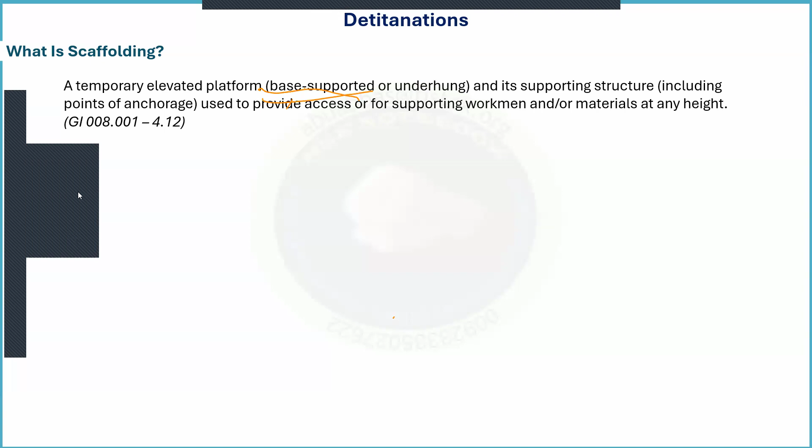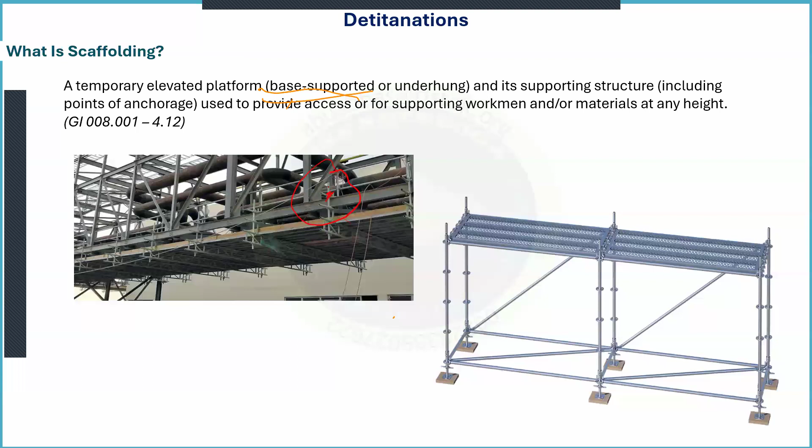Moving further, we have formwork. Formwork is another definition. We use this term according to GI, we will look at that. Formwork refers to a structure, a system, a pipe tube assembly that is used to support fresh poured concrete.

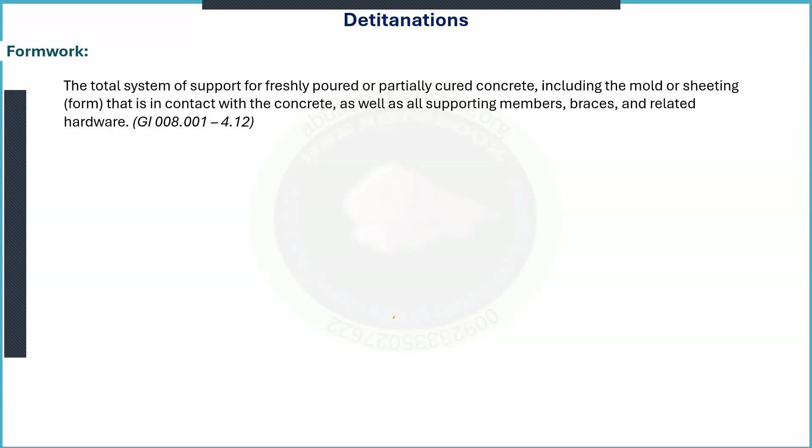For concrete pouring work, the installation we are going to install will be referred to as formwork. You can see here in the picture, there will be concrete expected, or maybe it's already poured in this picture. So that is what we refer to as formwork. Here you can see this picture as well, these supports for the work being carried out for the concrete.

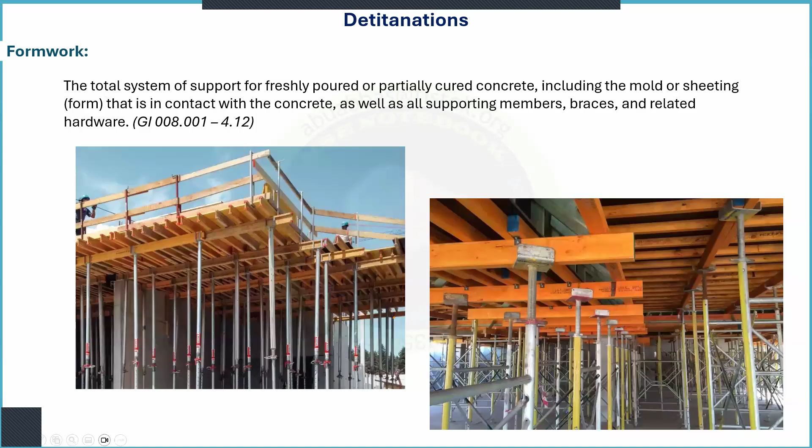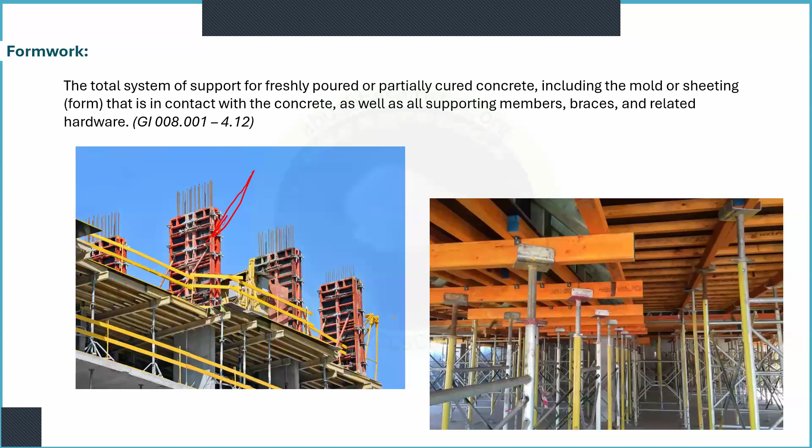Another minor thing I would like to add, in this picture you can see the vertical members. When the vertical things are used, like this one, we normally refer to them as shuttering work. For the concrete, when we use these vertical ones, these are referred to as concrete work. The other things, the horizontal on the plan and supportive structure, we refer to as formwork. Then we have another definition: falsework shoring.

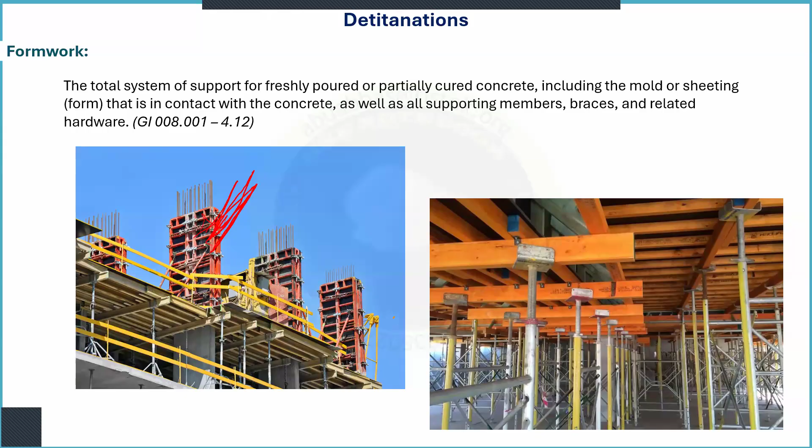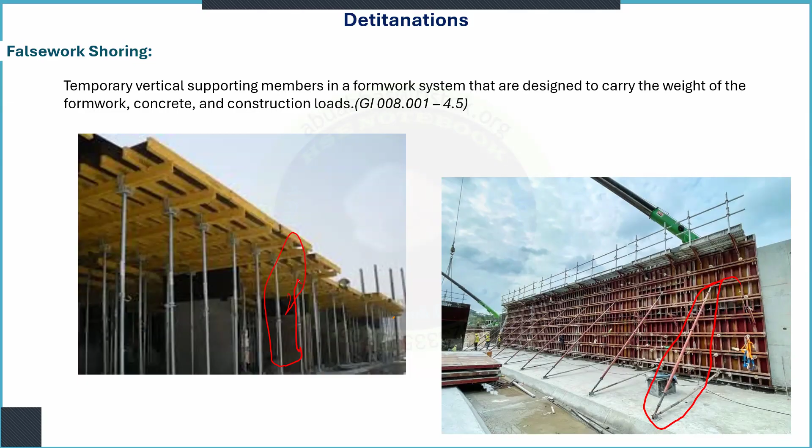Falsework is also used to support any structure temporarily. For example, we are going to erect the second structure and roof, and we are giving support to the first one, that will again be a falsework. We have a temporary construction load, brick storage, or something else, and we want to give support to that roof over which we are putting this material. We refer to it as falsework also.

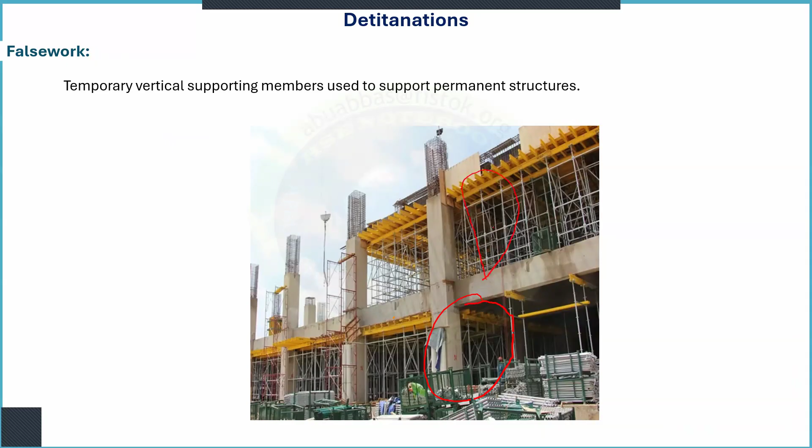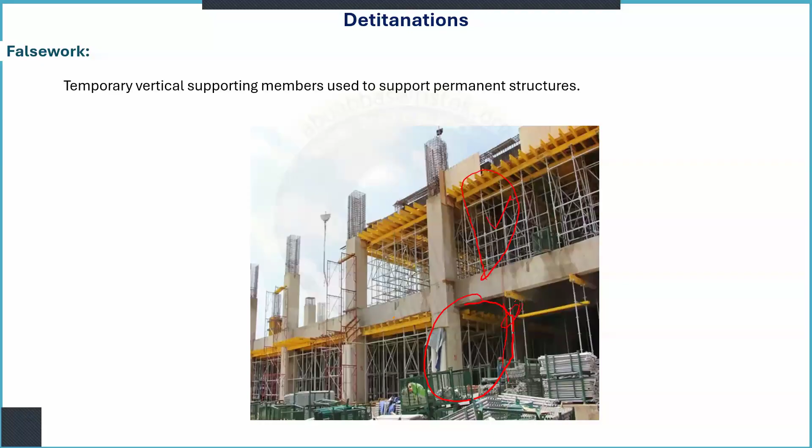Again, a temporary vertical supported member, like here one already seems finished in the base section, we can say it's completed, and then we are going for another one, and we have a support. So this is fresh work, and this already cured or maybe during cure. Additional support to anything we refer to as giving temporary enhancement or support, this is what we also call falsework. Aramco GI's definition uses the term falsework shoring.

Scaffold craftsman: we define a person as a scaffold erector. That erector has to work under direct supervision of a scaffold supervisor for any type of erection, alteration, or dismantling. There are three definitions here: erection, alteration, and dismantling. Erection of scaffold means making the scaffold, building the scaffold. This is what we refer to as erection.

Dismantling is when we are bringing the scaffold down, when we are removing it. Altering or modification is when we do any type of change, for example shifting the guardrail up or down, or giving access, a pathway in the platform. Structurally, we normally do not prefer it, but it can be done if not made for the exact work. Anyhow, when in an already made scaffold we do any type of change, that change we refer to as alteration.

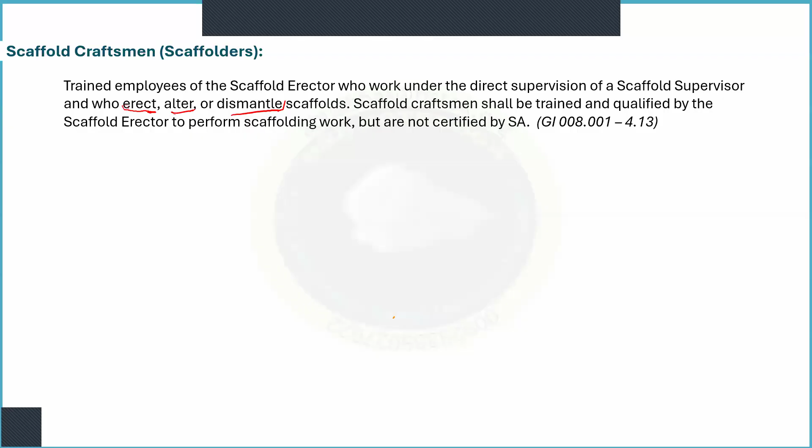Scaffold erectors, as mentioned in the GI at 4.13 section, are to be trained and qualified by the company they own, or the scaffold erector organization they work for. They are not mandatory to be third party. If an organization has approved in-house training, they can provide it, or third party can provide it. These are the two options, and they are not required to be Aramco certified.

Scaffold erector: the organization or company responsible for proper designing, erecting, alteration, dismantling, and modification of scaffold work. That company will be called a scaffold erector.

There is another terminology: special scaffold erector, if I'm not mistaken. They are specific approved companies from Aramco. When the name comes up in a further slide we will discuss it again, like R.B. Hilton, Al-Suwaidi, Al-Imran, SGB, and a few other contractors. They are special contractors for special scaffolds, and we will talk about them again when the discussion comes up in the slide, inshallah.

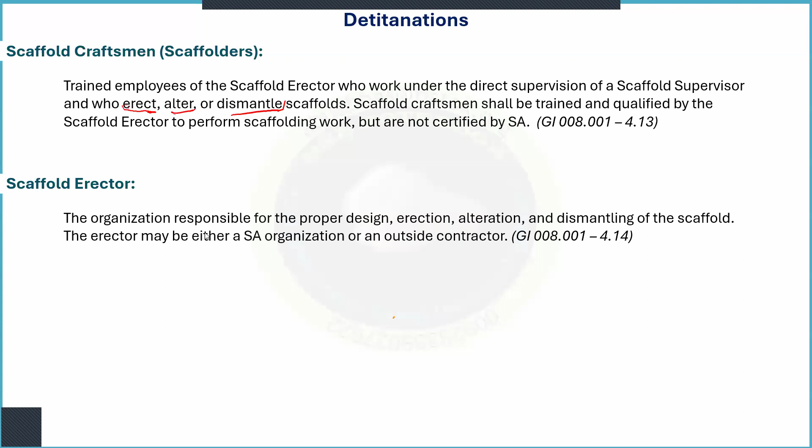After that we have the scaffold inspector: a contractor or Saudi Aramco employee, trained and experienced, capable of performing a scaffold inspection. You have to identify hazards and weaknesses, or give assurance through inspection of a scaffold. This shall be certified.

The word 'shall', wherever it comes, means a mandatory requirement, 100% compliance in procedure language. 'Should' cannot be considered equal. So Aramco certified people are required.

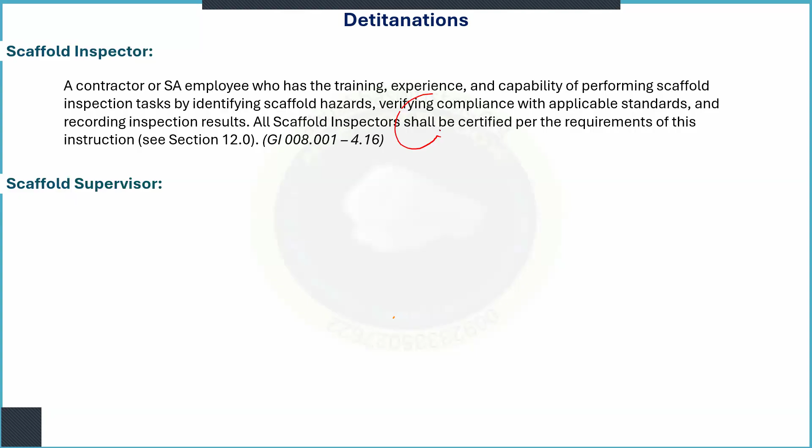Then we have supervisors: full-time employees of the scaffold erector, who are the immediate supervisor of craftsmen erecting, dismantling, altering, or modifying scaffold. He will be the direct boss of those people and will supervise those scaffold erectors. He has to be trained, qualified, and certified personnel. After supervising the work, one of his jobs is to inspect the scaffold as well.

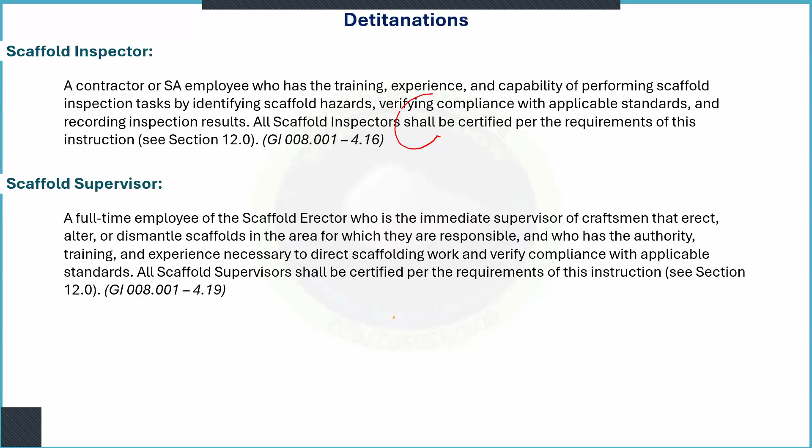Scope of supervisors: we have three types of supervisors in the Saudi Aramco pattern. We have scaffold supervisor 1, or S1. He can supervise scaffold erection, and in addition, inspect and sign tags for all types of scaffolds, including special scaffolds. He requires at least 5 years of experience as craftsman with scaffold erection experience before he can get the Saudi Aramco scaffold supervisor S1 certification.

His limitation for card signature is that he can sign the card for any type of scaffolding, including special scaffold. But once it's special, the inspector has to countersign the card, and in addition, whenever the scaffold is above 6 meters, the inspector has to sign along with the scaffold supervisor 1. Commonly we have these scaffolders, but special contractors, according to their material use, have others as well.

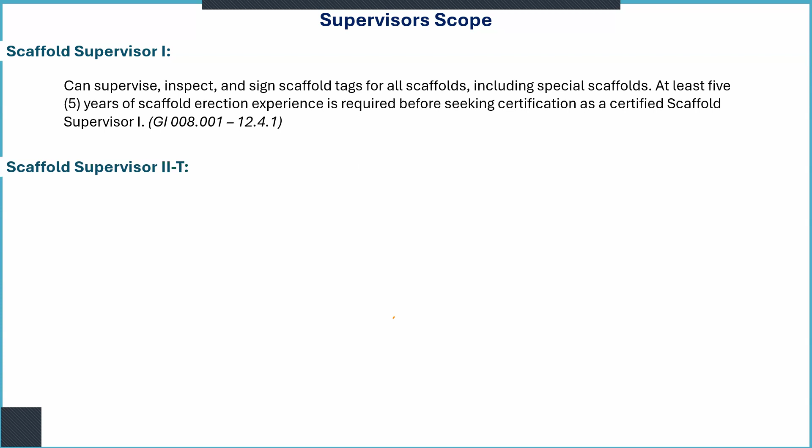Scaffold supervisor 2T can supervise and inspect scaffolds of tube and coupler only, maximum up to 12.2 meters, alone. Only tube and coupler scaffold less than 12.2 meters tall, excluding special scaffold. They cannot sign for special scaffolds. Up to 12.2 meters they can sign alone, no need for signature and inspection by an inspector.

Similarly, we have scaffold supervisor 2S, S for system scaffold. They can supervise erection, dismantling, modification, and then inspect and sign the tag for a system scaffold or fabricated tubular frame scaffold, again less than 12.2 meters of height, excluding special scaffold.

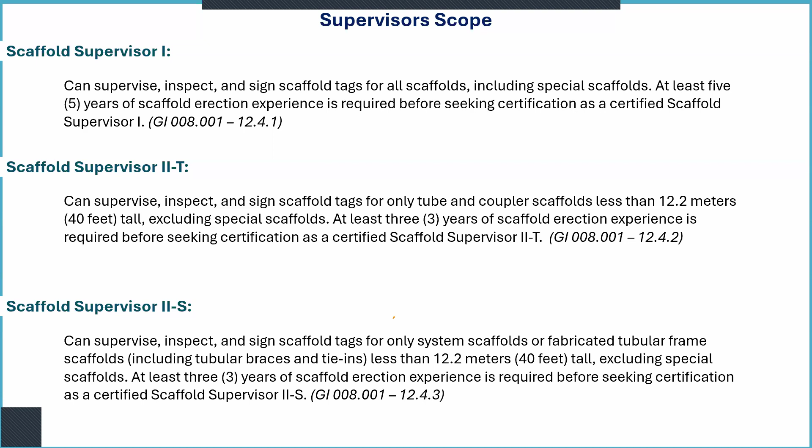Yes, gentlemen, can you hear me still? Yes, sir, we are hearing you. Your interference, a little bit of interference, will be appreciated. So I know that someone is still with me. Yes, sir, thank you.

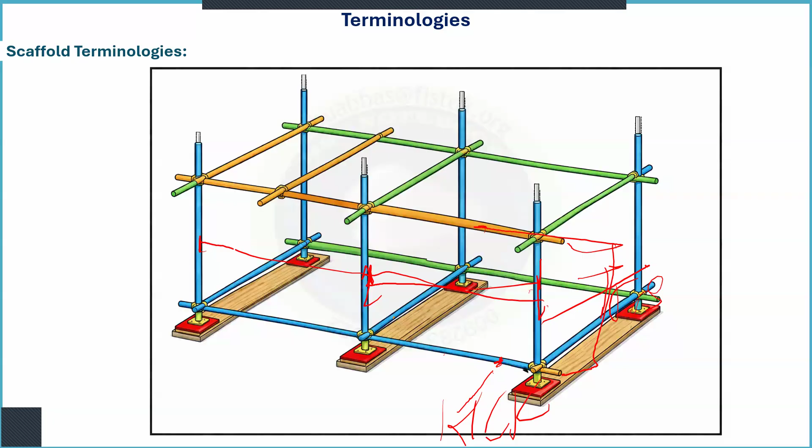Okay, purpose of 2.1, it means that wherever we mention, like GI was mentioned, it means... gentlemen, I'm having a response, the voice is coming. So you can check your mic or so on. Or if someone else is having trouble, let me know.

So where we are not using a reference, it means we are giving the reference number of CSM, Construction Safety Manual, Volume 2, Part 2, Chapter 2, Scaffolding. The scaffold CSM says this chapter describes minimum safety related technical requirements for personnel access scaffolds with fixed platform heights. So it's telling us that the platform height will be fixed.

Meaning we are not talking about ones we can lower with a chain or rope, either ground supported, underhung, or above any structure, but non-extendable, non-retractable, with solid measurements, with solid members - this is what this scaffold will be.

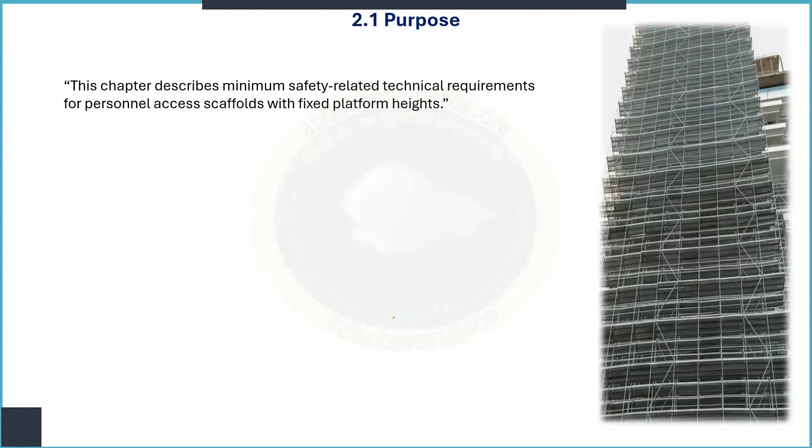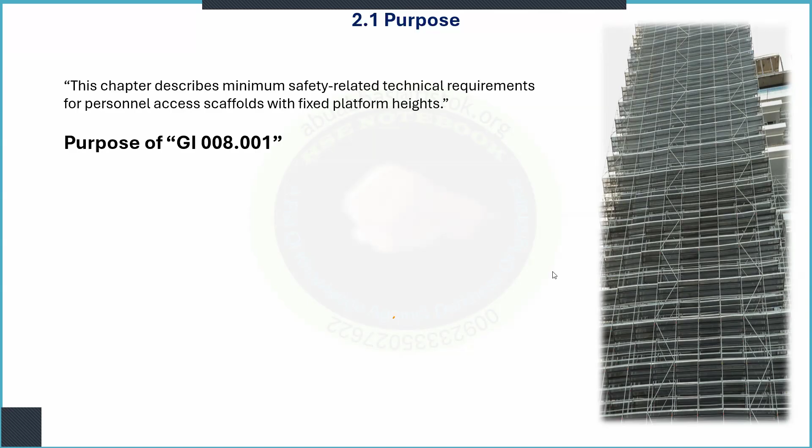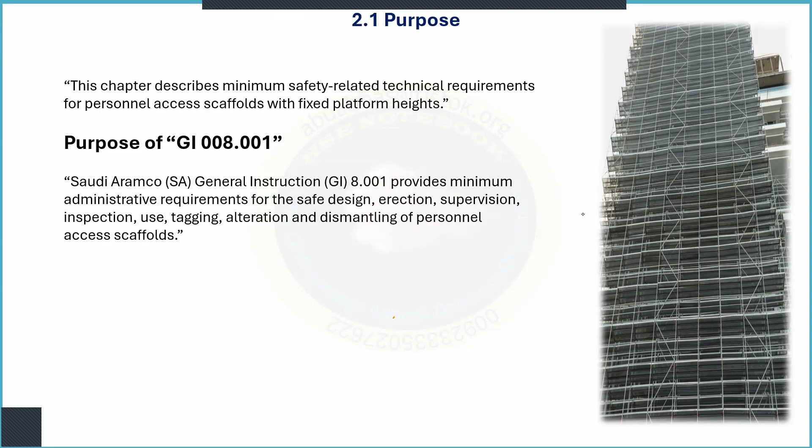Okay, let us proceed. So the purpose of the GI, general instruction, is to provide minimum administrative requirements. So this is the difference between our CSM and GI - CSM goes for technical requirements, while GI goes for administrative requirements.

What we are not going to discuss in this continual session: how to erect scaffold, meaning the step-by-step procedure. We are not going to talk about how to supervise erection, but we will talk about some of the responsibilities of supervisors. How to inspect, again, we are not going to talk about the GI as a whole. No, we will go just with the references.

Scaffold plan, a little bit where it will come, we will discuss. We are not going to talk about how to prepare these things. Most of that is covered in the GI. So when we are not covering the full GI, we are not talking about it.

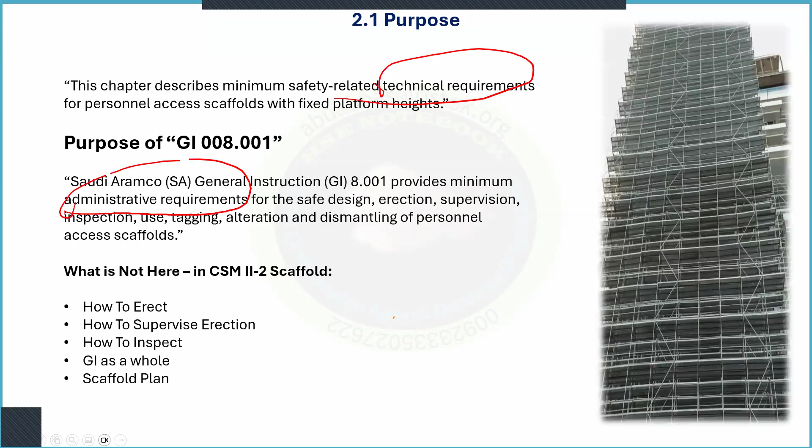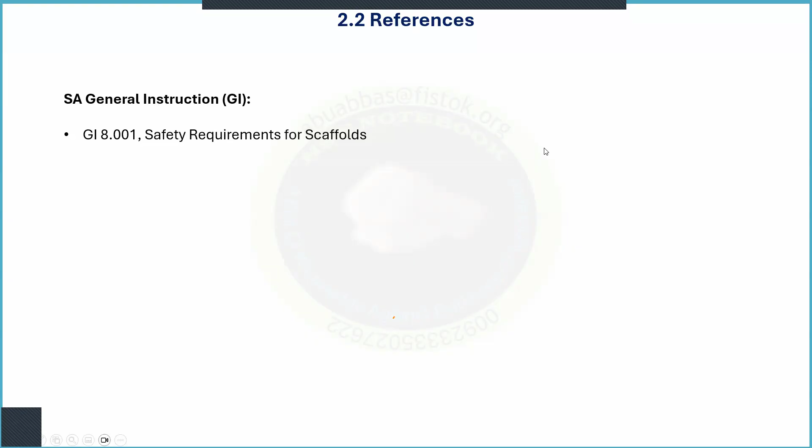Okay. The GI, the references. Okay, we are going to talk about now the references. Those are used in the CSM 2.2. Other than the CSM, we are required to follow GI general instruction, Gulf Standard 217-1994.

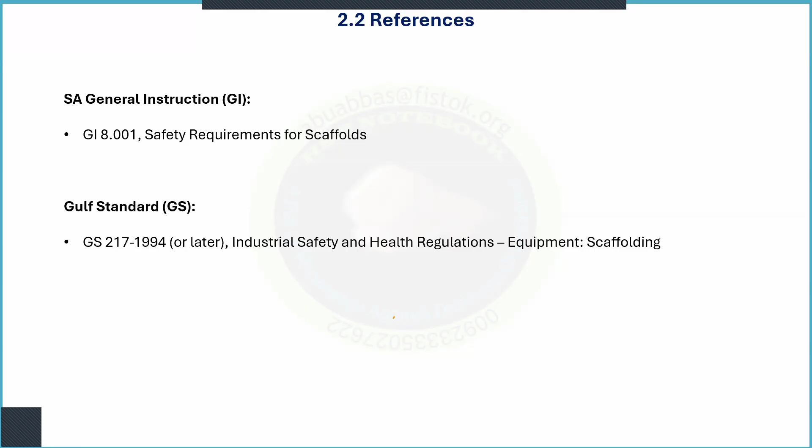I tried my best to have this one, but I didn't get it. If any one of you has this Gulf Standard, I will appreciate if you share it with me.

Then we have American National Standard Institute, ANSI, and American Society of Safety Engineers, ASSE. Their requirements are being followed, like ANSI A10.8, safety requirements for scaffold, American Society for Testing and Materials, ASTM, A123, for example, zinc-coated, hot-dip coated iron and steel products, A370, standard for testing methodologies, A500, standard specific for cold formed, welded and seamless.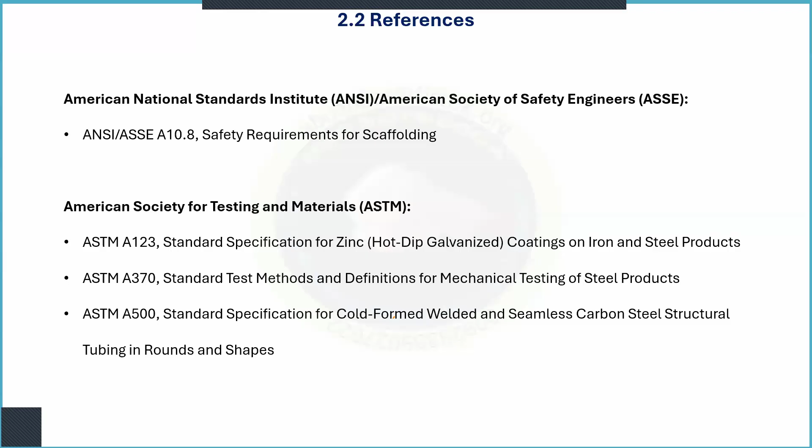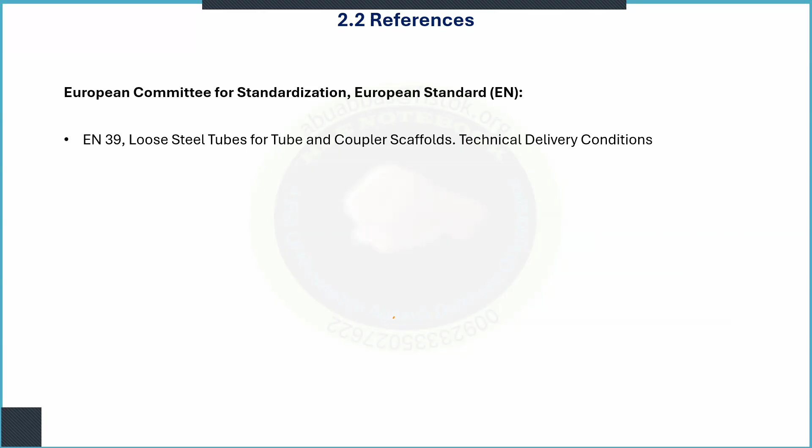Normally we have two types of tubes, seamless without any joint, and welded, of carbon steel and so on. This standard we have to use mostly when we are preparing plans. These things come. European standard, European Committee for Standardization, European Standard EN 39, loose steel tubing for tube and coupler scaffold, technical delivery. This overrides the BS 1139 part 1.

Coupler spigot EN 74-1. EN 74 marked couplers and other items, I can say them shortly, we will use. In other words, couplers. Either scaffold or falsework. Again, it overruled the 1139 part 2. Okay.

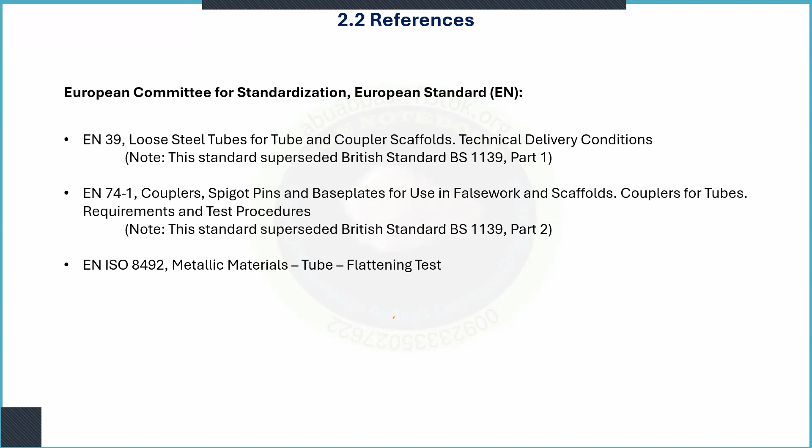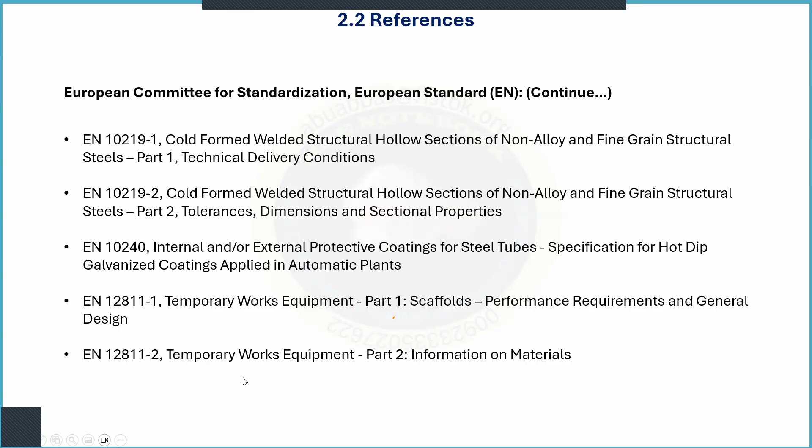EN ISO 8492, metallic materials. Again, EN 10002, metallic material there again. General technical delivery condition 10021. European committee again continued, EN 10219. Similarly, 10219 part 1 and 2, and 10240, internal coating and so on. Hot dip galvanized, 12811. That's again something related to performance requirement and general design. Information on material, we have the reference load testing according to EN 12811.

ANSI, NASC, National Access and Scaffolding Confederation. Specifically, fall protection for scaffolders. We will inshallah try to cover that in this series. Preventing falls in scaffold and falsework. And SG4:You, for you as user. It's a pocket guide. We will inshallah bring it into our discussion.

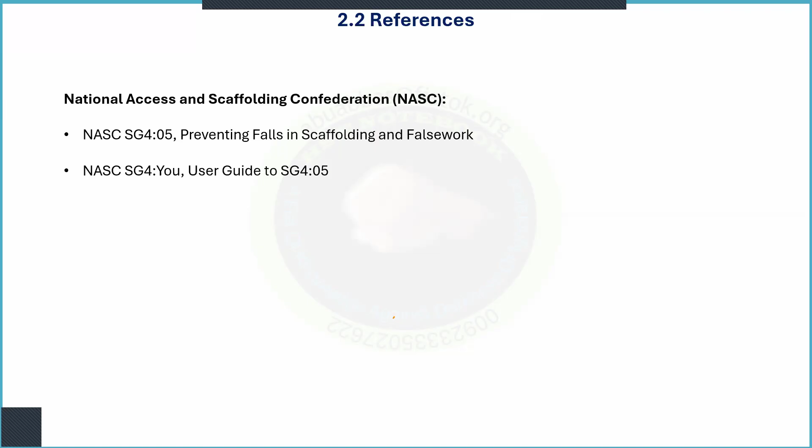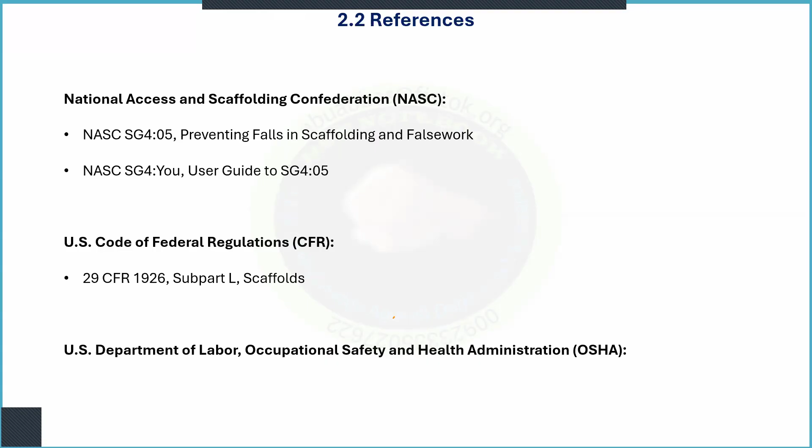US Code of Federal Regulations, 29 CFR 1926 subpart L, specifically for scaffolding, and OSHA 3150. Okay, actually there were a few additional things, but because of lack of time, we just had a quick go-through. Now we will talk about scaffold types. Scaffold types.

2.3.1 of the CSM says the types of scaffold covered in this chapter are those commonly used in Saudi Aramco, including tube and coupler system, fabricated tubular frame, bracket, underhung and mobile scaffold, and they shall be designed, constructed, inspected, tagged and used as per GI 8.001. Administrative requirements. Technical requirements, the CSM will provide.

Now the question is, how many types of scaffold do we have? Volunteer answer, who will? How many types of scaffold do we have? The mobile scaffold, fixed scaffold. Okay. And anyone else would like to contribute to the answer? Wheel scaffolding, sir. Tube and coupler scaffolding. Transverse scaffolding. System scaffolding, sir. Okay, cantilever scaffolding. Appreciated.

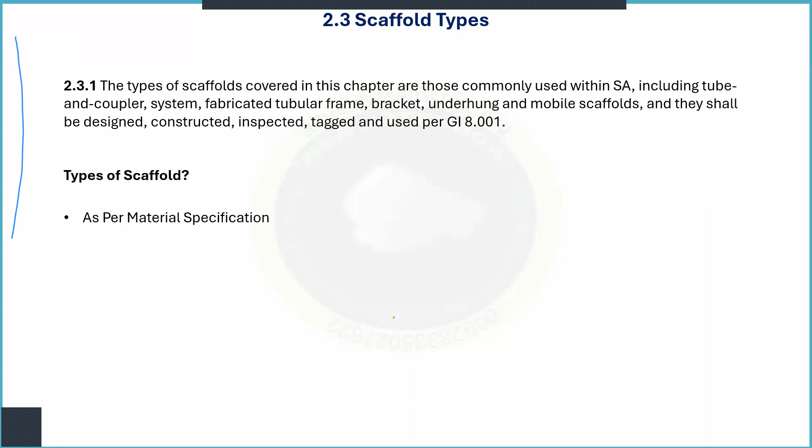So type of scaffold, are we going to talk about it as per the material specification, or as per the load rating, or as per the design? So commonly, it's a simple open question. Whatever answer you give, if it is what the interviewer or the one who asked meant by it, well and good. Otherwise, we have to be specific.

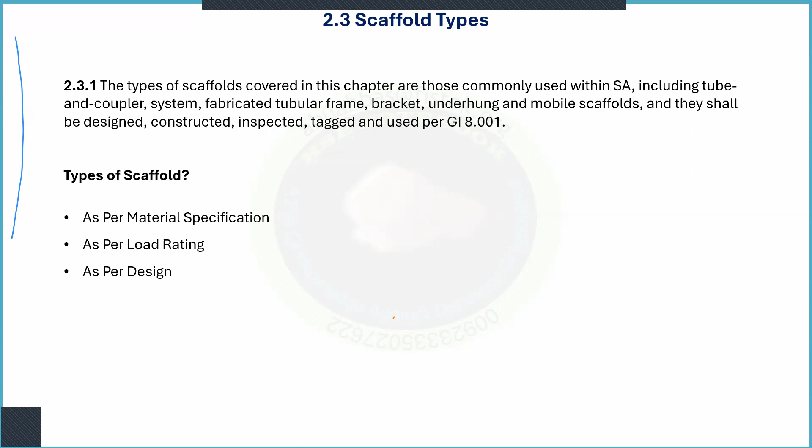So we are going to discuss according to that. As per material specification, we have system scaffold. One type we have is system scaffolds, the one you can see here. System scaffold is the one which comes with fixed adjustment points. These are welded fixed points, fixed heights, elevations, up to which we can fix the things. Okay. Already welded, made, we have just to engage them.

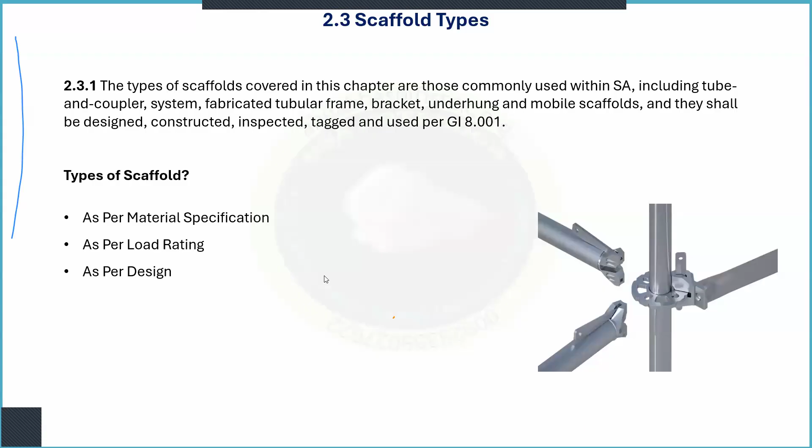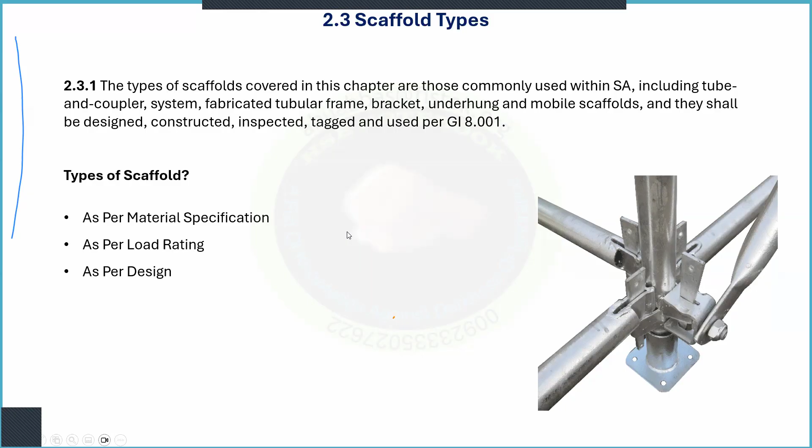Like this one in the picture, this is what we call Kwikstage, quickly to be fixed, Kwikstage, but it's a system scaffold. Wedge scaffold, again, that's a system scaffold. Already welded point, we just fix, we put the wedge there, we strike, and that's it. And then common scaffold, normally it comes in a yellow color mostly, but anyhow, any color can be.

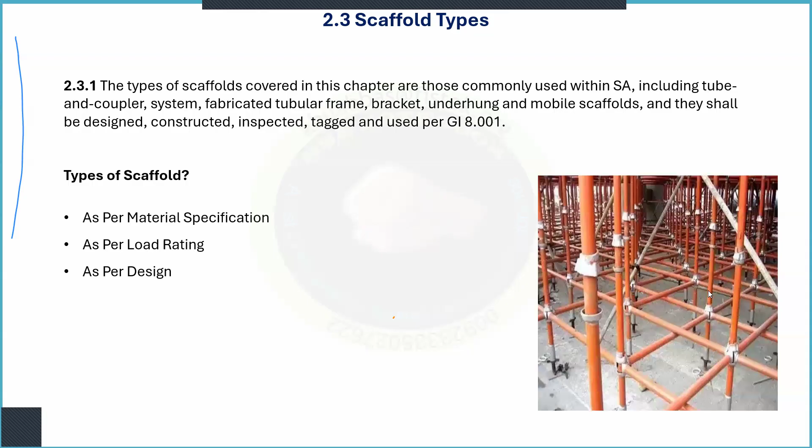Then the most common, most famous one, the cup lock scaffold. Again, they are the fixed points. We just put them together, we lock them, and we are good to go.

Okay, hopefully everyone is back. Yes, sir. Yes, sir. Yes, sir.

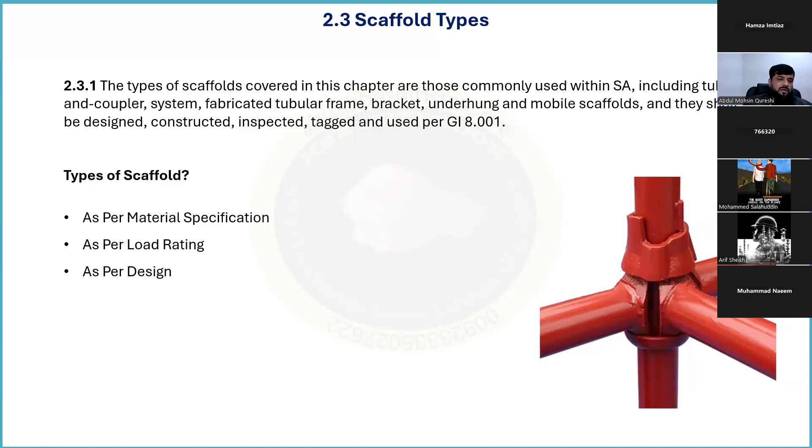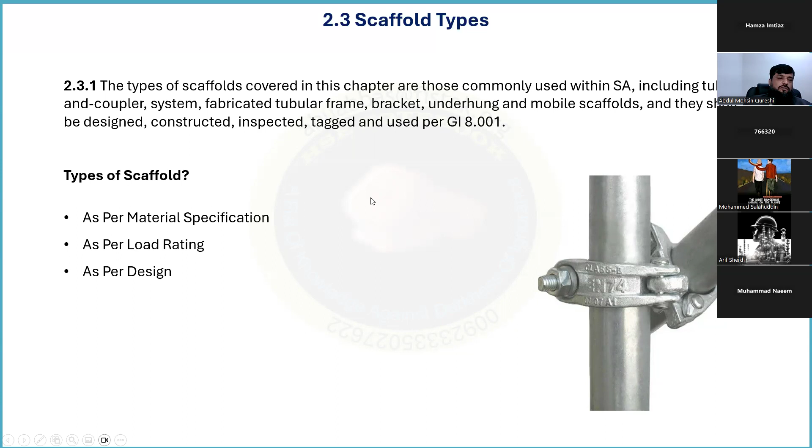Yes, sir. Okay. So this is the most common type of scaffold we are using, cup lock scaffold. That's a cup which is being locked, system scaffold. Then we have tube and coupler. System scaffold is one type. The second one now comes, you can see here it's clearly mentioned EN74. That's the standard we use. And you have tube and coupler. We have a tube which is engaged with a coupler, or the couplers are used to engage them or give them a formation or design.

Tube and coupler scaffold. Then we have fabricated frame scaffold, or fabricated H-frame scaffold. This is a third type of scaffold as per the material specification, which is being used in Aramco. So the three classes we have: system scaffold, tube and coupler scaffold, and fabricated frame scaffold.

Now we go to the second, as per the load rating. Generally, we have a lot of scaffold types according to load rating. We will talk about it according to Saudi Aramco. Light duty scaffold: in 1 square meter, the scaffold platform can support 120 kilogram distributed load. In pounds, it will be 25 pounds per square foot distributed load, and in kilogram, 120 kilogram. That scaffold we refer to as light duty scaffold.

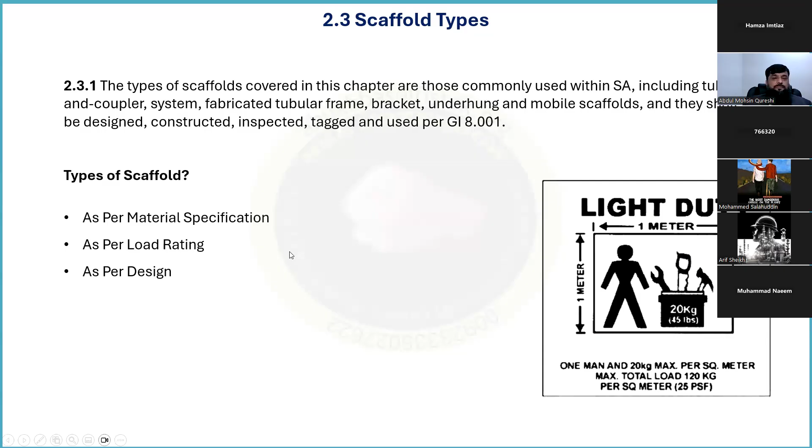Then we have medium duty scaffold, the scaffold which is erected to support maximum 240 kilogram distributed load on the platform. Again, my mentor was once asked this question, load rating. He says according to structural capability or the platform. So platform is the most common, the one we are using. In formwork, structural calculations are there as well, but we are talking about the platform. So if the platform can support 240 kilo maximum load, 50 pounds per square foot distributed.

Commonly, we refer to one person, 20 kilograms of tools, 100 kilo for the person. If one person along with the tools is supported, or two people along with their tools, 240 kg, that will be a medium duty. Any scaffold which is erected to support above 240 kg will be special duty. Light duty scaffold, medium duty scaffold, and special duty scaffold.

Special duty will be any scaffold designed to support more than 50 pounds per square foot, or more than 240 kilogram per square meter. And remember, special duty scaffold is a special scaffold. We will talk about that inshallah tomorrow: what are the criteria for special scaffold, when a scaffold will be a special scaffold. But one criterion is if it is designed to support more than 240 kilogram per square meter.

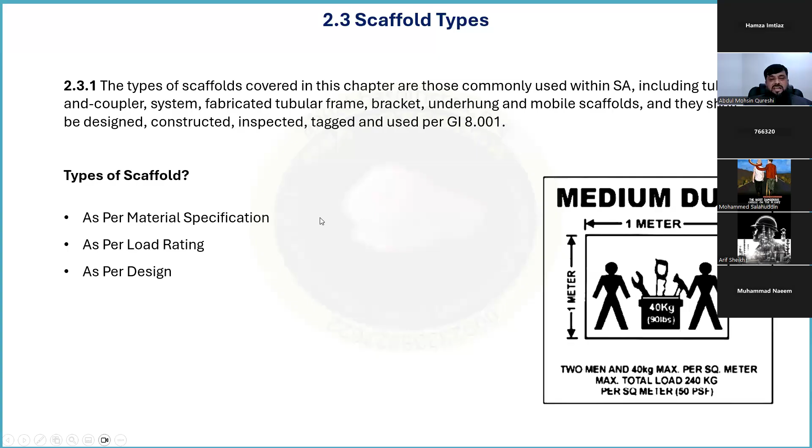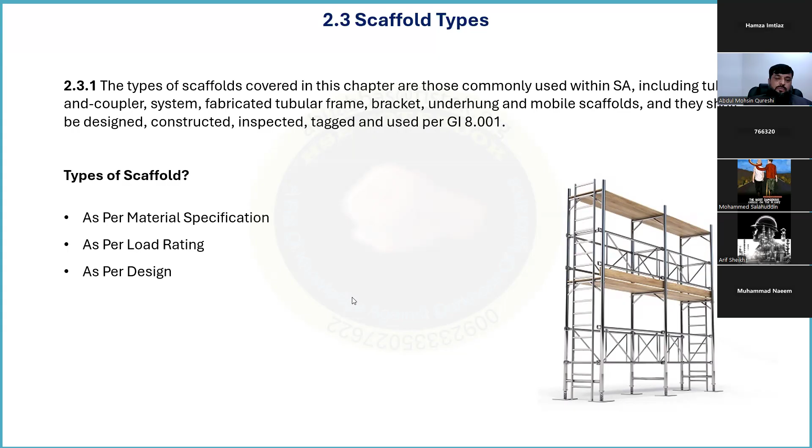Then we go for the design. In design, again we categorize. The first categorization is base supported: the scaffold is base supported or not. So one type is base supported scaffold, like the one in the picture, you can see the foundation is on the ground.

Then we have underhung or suspended scaffold. It can be underhung, hung from something, or supported by a structure. Either it is hanging from a structure or it's supported over a structure, a structure which is above ground, definitely. Like in this case, if it is hanging from this beam, or it is above the beam, because the beam, pillar, column, whatever, is not directly on the ground, it is supported by that structure.

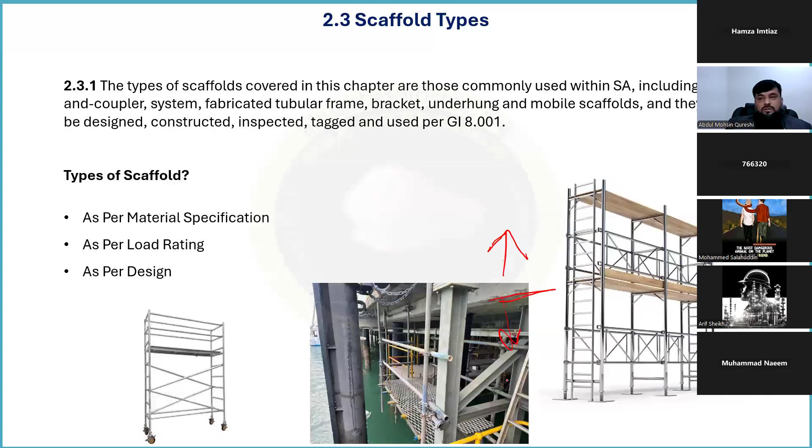So one is the one which is, okay, the pause for the internet interruption. The one which is supported on the ground, and the second one which is supported from any structure or hanging from any structure. Then we have mobile scaffolds. Mobile scaffolds, okay, those can be taken here and there with casters, with wheels.

And then another type we have, a little bit different, which we call a bracket scaffold or tank builder scaffold. It is hung from the wind girder inside a tank or from the wall of the tank. So this is another type as per the design. Where stands the tower scaffold? That's a base supported scaffold. In base scaffold, we make a little separation for that. Then we have bird cage, independent run, independent tie. We will talk about them further. The definitions will come. So generally, as per the design, we have base supported scaffold.

We have... yes, gentlemen, am I audible to you? Can you hear me? Yes, sir. We are hearing. Okay. Yes, sir. Thank you.

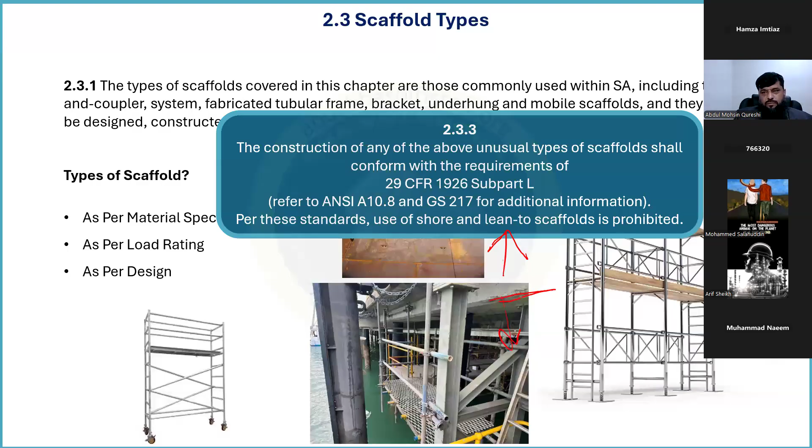So, a little bit more. 2.3.3 says the construction of any of the above unusual types of scaffold. Above, where the scaffolds are listed in the CSM, they refer to them as unusual scaffolds. If 29 CFR 1926 Subpart L, ANSI A10.8 and GS 217 support it, we can use any other type of scaffold which is not being used in Saudi Aramco. If 29 CFR 1926 Subpart L, GS 217 or ANSI A10.8 support that type of scaffold, we can use that scaffold in Aramco, but definitely there will be an initial way to have the approval.

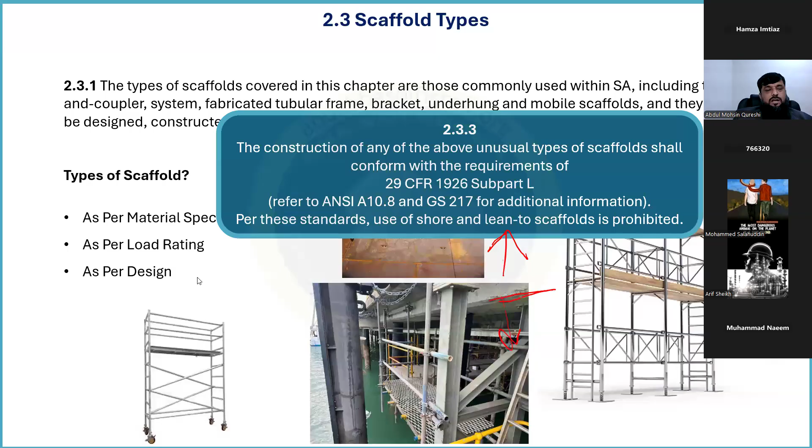Then we can use it. But two types are mentioned: shore scaffold and lean-to scaffold. They are not allowed even in 1926 Subpart L. They are not allowed. So these are two pictures of them. Shore scaffold, this one when it is against a column, a pillar, and the lean-to scaffold. Okay. So these two are not approved for use by any means. Other types, if we can justify that the mentioned standards allow them, we can use them.